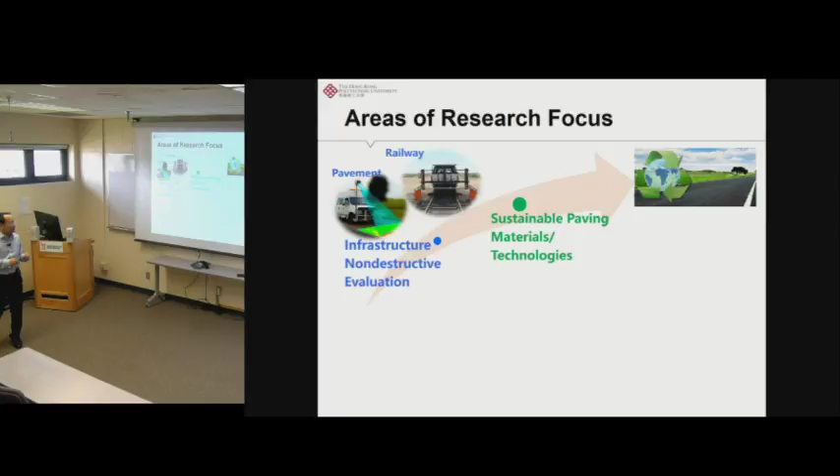The second area is about sustainable paving materials and technologies. Under this area, we worked on different recycled waste materials. For example, rubberized asphalt or warm rubberized asphalt, and also reclaimed asphalt pavement, and also waste plastic.

We also worked on different functional pavements. For example, we used porous asphalt as a way for stormwater management, and also for noise reduction. We also did some research on photocatalytic pavement, which is a functional pavement that can help degrade vehicle emissions.

One thing we have been working a lot on is low noise pavement. This is very important for high-density cities like Hong Kong, because of the high population density, many buildings are actually built right next to the roads. So how to reduce traffic noise caused by tire-road interaction is something we have spent a lot of effort on.

We worked on both low noise asphalt pavement, using technology like porous pavement or rubber material, and also worked on different surface textures for concrete pavement to optimize its traffic noise and skid resistance.

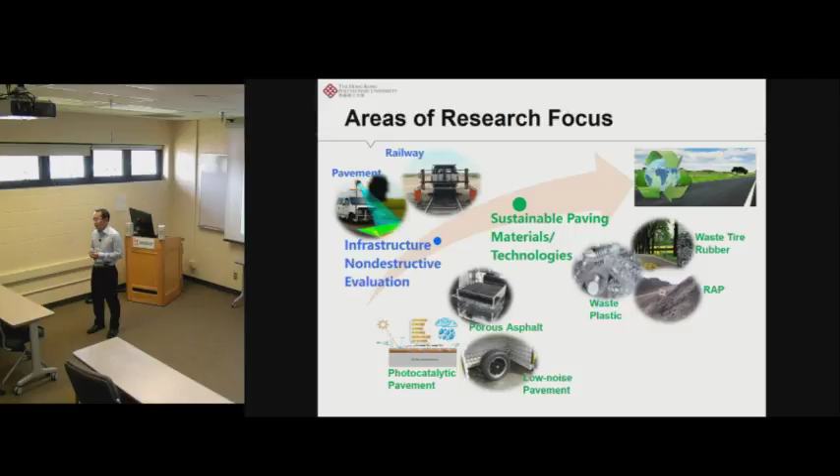Finally, we also work on different tools to quantify the sustainability of different pavement materials and technologies. I started working on this while doing my postdoc with Professor Al-Qadi here.

At that time, we worked on life cycle assessment, LCA, on warm mix asphalt. There's also other tools like eco-efficiency analysis, a similar tool, which allows us to provide quantitative information on sustainability that can be used by decision makers to make decisions.

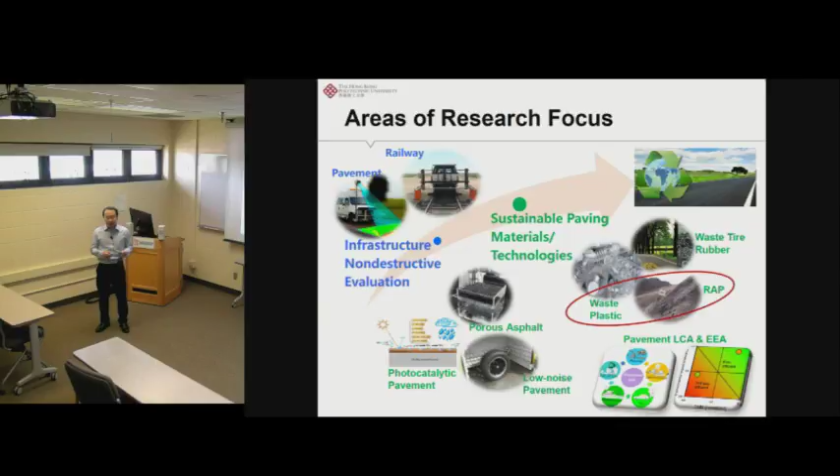So this is just a quick overview of the research we are conducting now at the Hong Kong Polytechnic University. In this presentation, I'd like to share with you our research on combining two waste materials: waste plastic and reclaimed asphalt pavement.

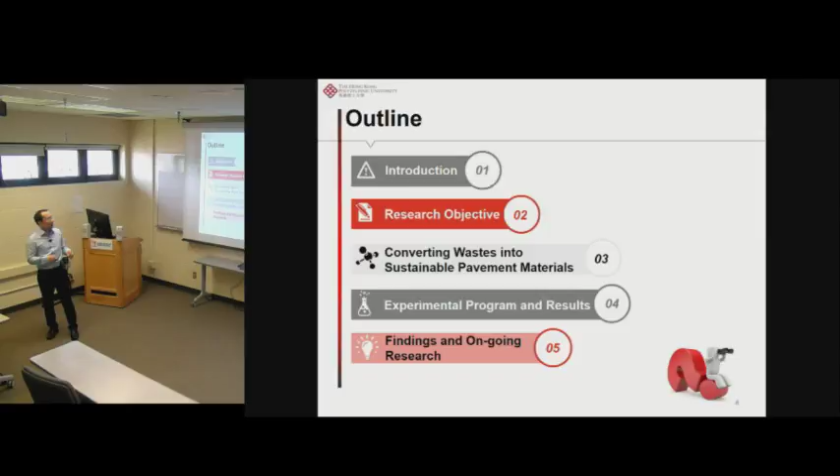Here is the outline for my presentation today. I'm going to start with a brief introduction to the two waste materials we are investigating in this study: waste plastic and reclaimed asphalt pavement. First, the waste plastic.

When we talk about waste plastic, first we should know what plastic is. Plastic is a material we are all very familiar with, it's almost everywhere in our daily life. But one thing we should be aware of is that plastic is not a single material, it's a family of thousands of different materials designed for different purposes.

We have both thermoplastic material and thermoset material. For thermoplastic, for example, PVC, PE, or PET are all thermoplastic materials. For thermoset material, we have things like polyurethane or epoxy. Right now there is some research ongoing on using polyurethane and epoxy as cold binders to produce cold mixtures, so we are also working a little on that.

I'd like to emphasize that when we talk about plastic, it's a big group of materials instead of one single material. In this study we cannot deal with all the different types of material, so we mainly work on one of the plastics, which is PET, a material used to make water bottles and drink bottles.

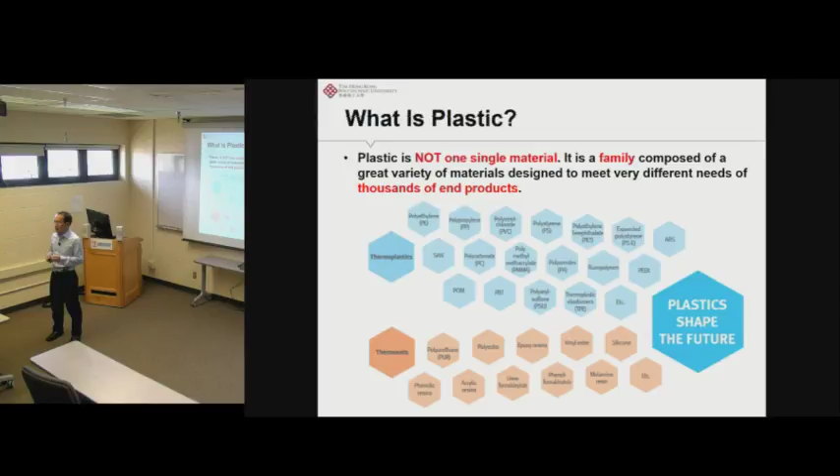For different plastic materials, we can use them to make different products serving different purposes. So we have plastic bottles, made of PET material, and also plastic bags, which we used to use a lot in supermarkets, made of PE.

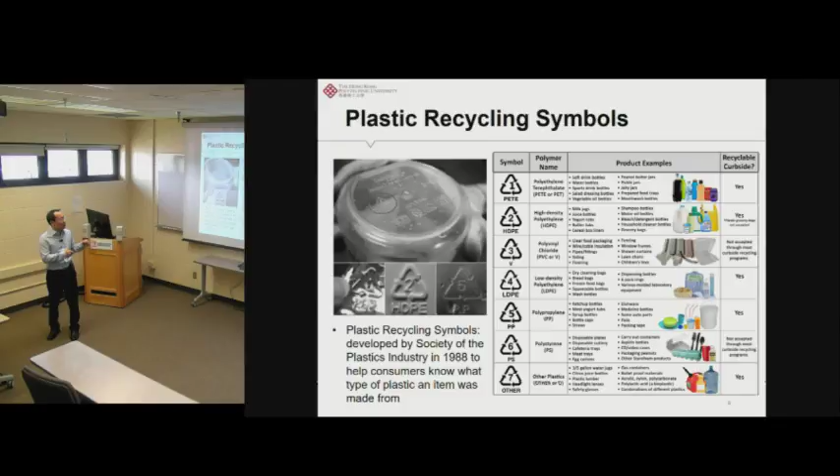To differentiate the different plastics, the Society of the Plastics Industry developed some symbols. If you have a water bottle and flip it to look at the bottom, you will see a triangle-shaped symbol. By reading these symbols you can identify which type of plastic was used to make that product. For example, if we see number 1 inside, it always refers to PET or PETE. So for all drinking bottles, you will see number 1 labeled at the bottom of the bottle.

Here are some statistics on global plastic production. In year 2015, the total plastic production in the world was about 269 million tons, which is obviously a huge number.

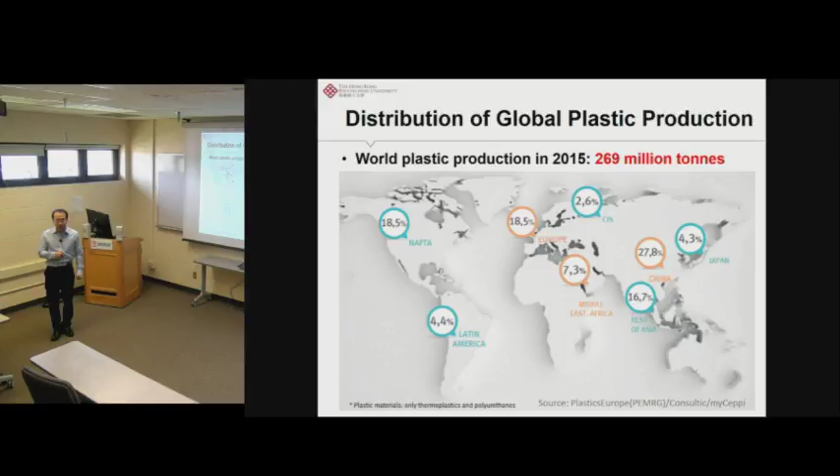As expected, China is the country which produced the most plastic, followed by Europe and North America. Currently in Hong Kong, waste plastic is the second largest waste category of municipal solid waste. Probably you can guess what is the first largest waste category.

Jaime, you know what it is? Paper? Paper?

That's not correct. Rubber? Flour? From tires? Rubber is not as much as actually the waste plastic. Who said food? Yes, food waste is the number one waste category of municipal solid waste in Hong Kong, and I think also probably in most cities in China. But waste plastic is the second largest, so a lot of waste plastic is produced.

According to statistics, you can see how the waste plastic production and disposal rate increased over the years. But at the same time, we noticed that the plastic waste recovery rate in Hong Kong keeps decreasing. This is due to some complex reasons, probably related to some political issues. Anyhow, there's severe imbalance between waste plastic disposal and recovery. In 2015, the total amount of plastic waste was approximately 800,000 tons, but only about 10% of the waste plastic was recovered through recycling. So we are facing a big challenge of recycling waste plastic material.

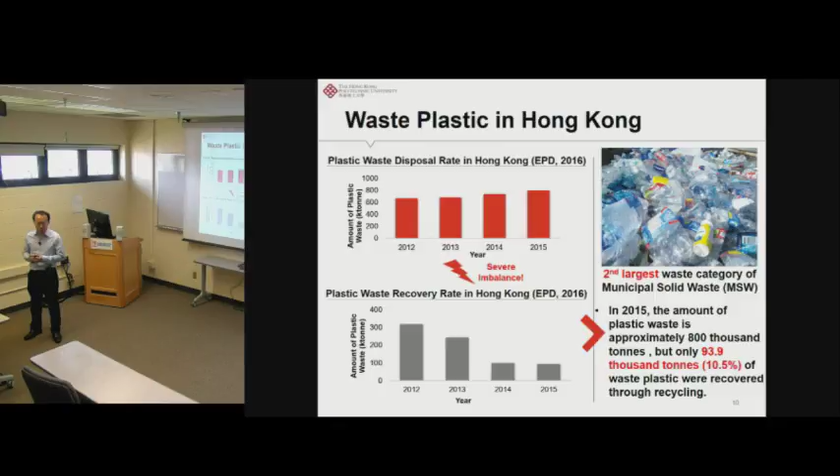To manage waste plastic, there are two ways. The first is landfilling, but obviously this is not an ideal method. First, it decreases our land space, especially in cities like Hong Kong, where we are very short of land space. We don't want a lot of waste occupying our limited land space. Also, if not done correctly, it may cause land and water pollution. Because of this, increasing recycling and reuse is not only desirable, but rather essential.

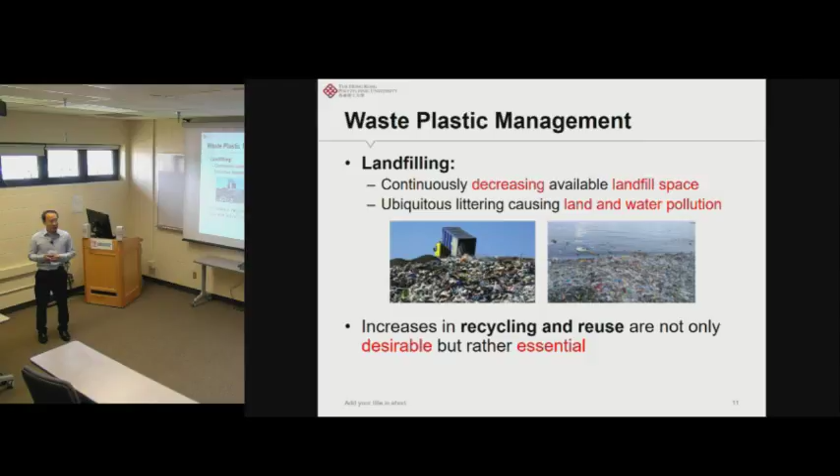To recycle waste plastic, we have different options. We might use the mechanical or physical way, cutting the waste plastic into small pieces without any change to its chemical composition, then reuse it. We can also do it in a chemical way, which means first chemically changing the material and then using it. Or we can do it in a thermal way, incinerating the material to produce energy.

In pavement engineering, we also want to contribute. Quite a few people have tried using the mechanical way to recycle waste plastic into asphalt mixture, basically treating waste plastic like waste tire rubber, cutting it into small pieces and adding it to the asphalt mixture. But this was not very successful. Many researchers tested the mechanical performance of the mixture after adding waste plastic, and found the mechanical performance is good.

But during production and storage, there are two major concerns. One is emission during construction, because for hot mix asphalt, we have to heat the material to high temperature, and at that high temperature, adding waste plastic may generate emissions. Also, storage stability is a problem because the plastic material has a very smooth surface, which does not allow good compatibility between the plastic material and the asphalt binder. Because of these two major concerns, there has not been much real field application of physically or mechanically treated waste plastic in asphalt pavement.

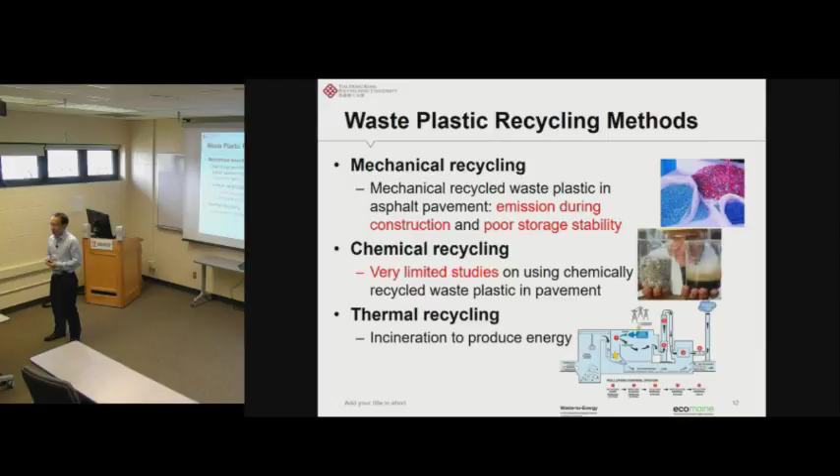In addition to physical treatment, we can consider chemical treatment, but in this area not much has been done yet. This is actually one of our motivations for conducting this study. We want to see whether we can first convert waste plastic into a different material, then add it into asphalt mixture. In this way, we want to overcome the two limitations of mechanical recycling, and we also want to know whether, after such chemical treatment, our plastic-derived material or additive can help improve the performance of asphalt mixture as a modifier or additive. So that's just some brief background on waste plastic.

Now we are switching to RAP. We know that waste plastic is one of the major types of municipal solid waste, and in addition to municipal solid waste, we also have construction waste as another major type of waste material.

In our pavement engineering, we all know that reclaimed asphalt pavement, or RAP, is one of the major components of waste produced from road construction. The reuse of RAP has been very widely promoted by transportation agencies all around the world.

But the RAP application percentage usually stays low, typically 10 to 30%, mainly due to performance concerns, especially fatigue performance, low temperature cracking performance, and moisture damage resistance, because the aged binder becomes much more brittle. So we have big concerns about cracking resistance and moisture damage resistance. Unless we use certain rejuvenators or softer binders, we usually control our RAP percentage at a relatively low level.

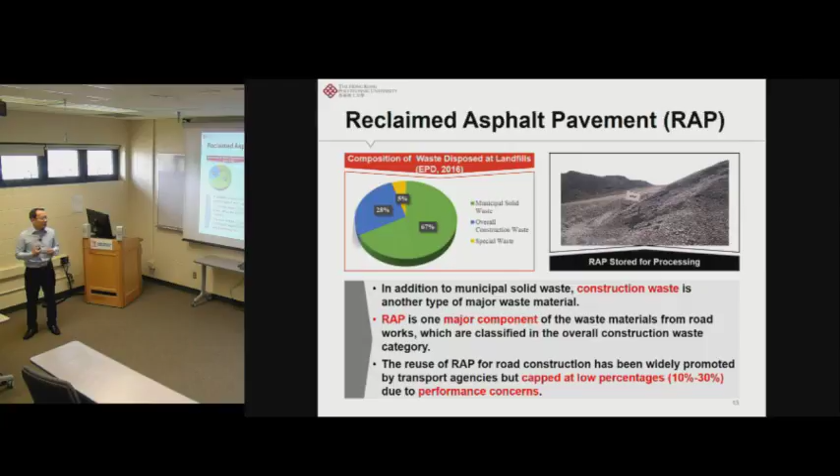So in this study, we were thinking whether we can first chemically treat waste plastic and convert it into some modifier or additive, and then use this modifier to improve the performance of RAP mixtures, especially those containing a high percentage of RAP. Our specific objective is to explore the feasibility of using functionalized additives, produced through chemically recycling waste PET plastics, in high-RAP bituminous mixtures, to make them more durable compared with those without the additive.

Our motivations mainly include, first, recycling two waste materials, plastic and RAP, simultaneously, and second, which is more important, improving the performance of high-RAP bituminous mixtures, especially their moisture damage resistance and cracking resistance. This is what we plan to achieve through this study.

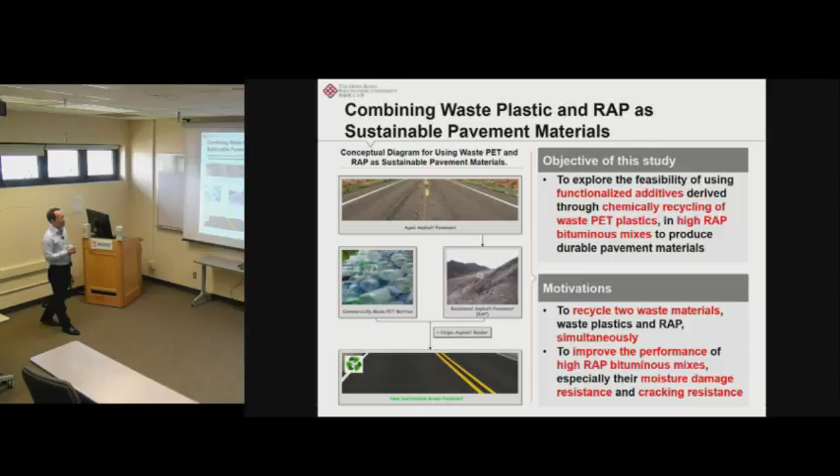So here is what we propose to do. First, we are going to collect waste plastic. As I mentioned, right now we are mainly working on waste PET, the plastic used to make water bottles. Then we are going to chemically treat the waste plastic and convert it into some additives, which we call waste plastic additives.

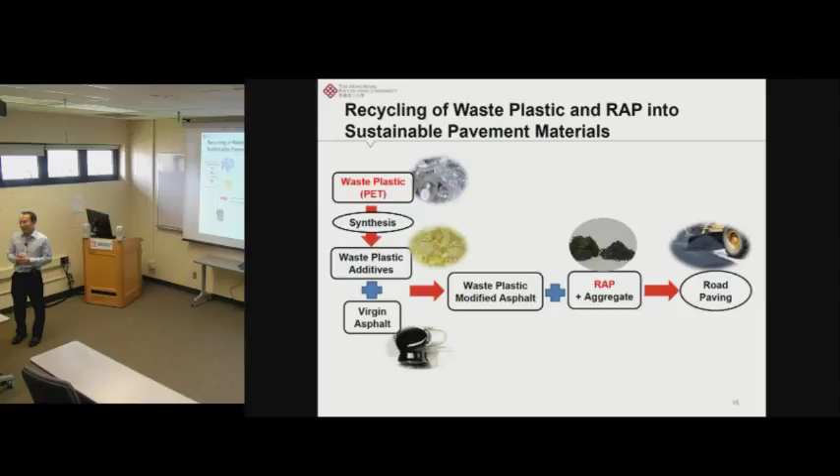Then we are going to add this additive into the virgin binder to produce the waste plastic modified asphalt or binder. Then we mix it with RAP and virgin aggregate to make the bituminous mixture, which can be used for road paving. In this flow chart, obviously the most important step is the synthesis step. This is going to determine whether this idea can finally be achieved.

In order to chemically treat the waste plastic material, we actually have many different options. Basically, if we use any chemicals to react with plastic and convert it into something new, we can consider it a chemical treatment. So we do have many different options, and in this study we actually selected a chemical treatment method called aminolysis.

So what is aminolysis? Aminolysis refers to a reaction in which an amine is a reactant and becomes part of the reaction product. Basically, we just use some amine material and make it react with waste plastic, and then we can chemically treat the composition of the waste plastic and convert it into something different.

The reason why we selected this process is, first, this process is considered atomic economy. Why is it called atomic economy? This is because after the chemical reaction, we will not lose any material, we will not lose any reactant. Everything we used for the reaction becomes the final product, so the leftover can continue to be used for further chemical treatment.

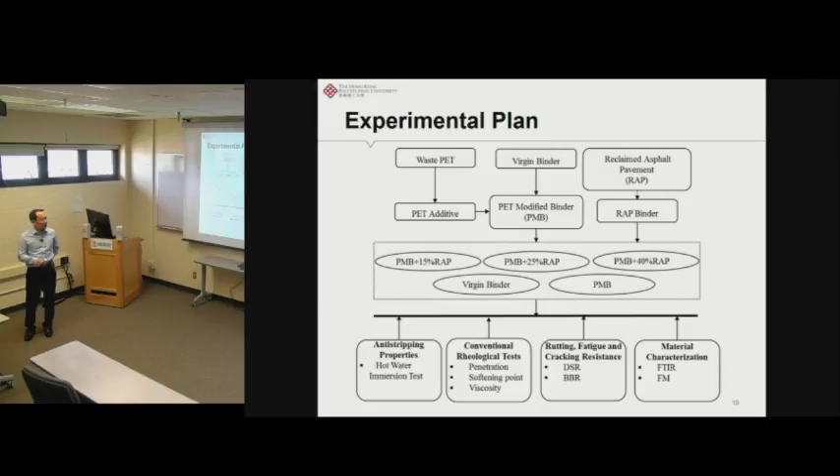We also have the virgin binder and the PET modified binder without any RAP binder as control materials, so in total 5 binders. For each binder, we conducted the anti-stripping property test, the conventional penetration, softening point, and viscosity test, and also the DSR and BBR test, and finally some material characterization analysis. Now I'm just going to quickly go through the results we have obtained for each of the tests.

First is the anti-stripping test. The anti-stripping test we conducted is the hot water immersion test according to the ASTM standard. I assume many of you are familiar with this test - basically we first coat the aggregate with the binder, then put it into hot water and boil the aggregate with the binder for a certain amount of time, then take it out to check the surface coating of the aggregate.

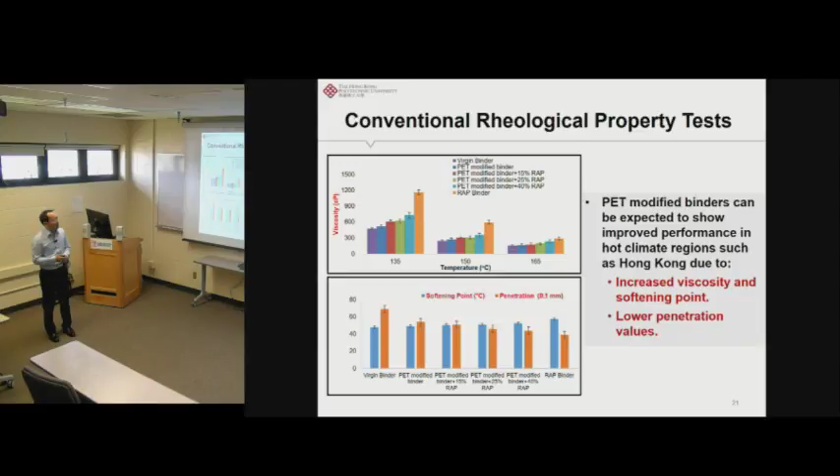indicate that the PET modified binders can be expected to show better performance in hot climate regions, such as where I'm now working, in Hong Kong. This is because it increases the viscosity of the binder and also decreases the penetration of the binder material.

But notice these tests are conducted at different temperatures. The viscosity increase is actually not that much, not that much. So this is important regarding the workability of the binder and the mixture.

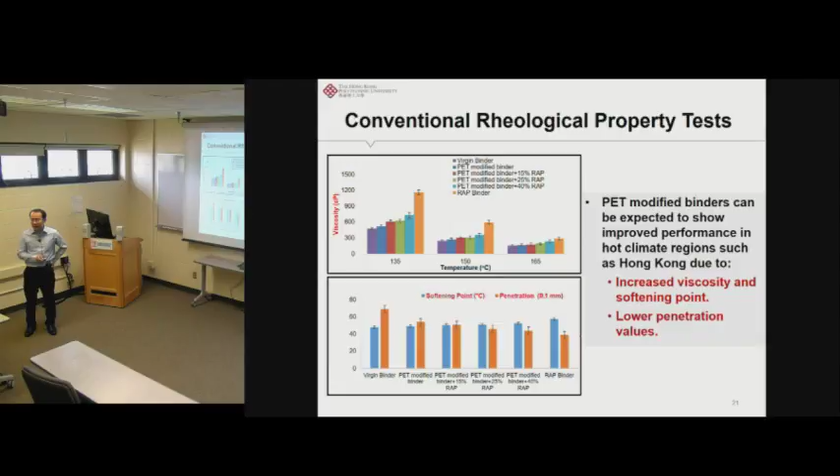In addition to the lab test, as researchers, we also did a bit of simulation, the molecular dynamic simulation. In the molecular dynamic simulation, we selected the conventional 12-component asphalt binder model, and for the PET additive, we just used its chemical formula to build its model.

Through the molecular dynamic simulation, we got a parameter called the cohesive energy density, and we compared the cohesive energy density of the virgin binder without any PET additive, and with 2% and 4% of PET additive. We found that the cohesive energy density actually increased about 25% after we added the PET additive.

This simulation result is consistent with our softening point, viscosity, and penetration test results, because a larger cohesive energy density indicates the material is probably a little stiffer.

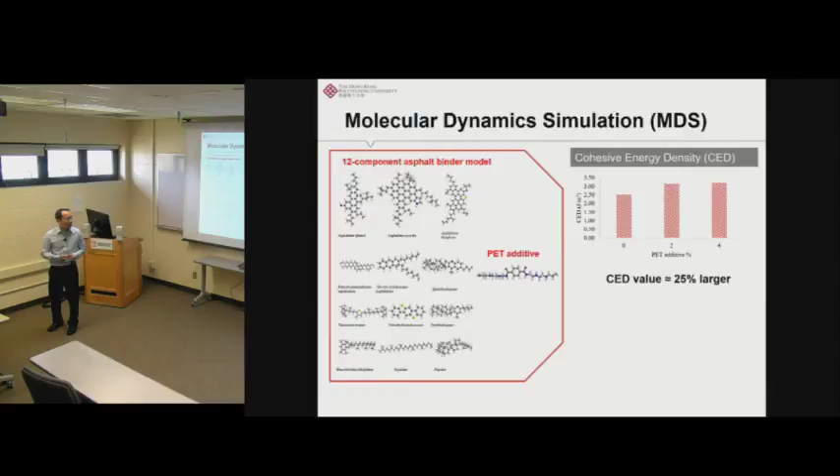Then we also conducted the DSR test to check its rutting performance and fatigue performance. We all know that by doing the DSR test, we can get two important factors: one is the rutting factor, one is the fatigue factor.

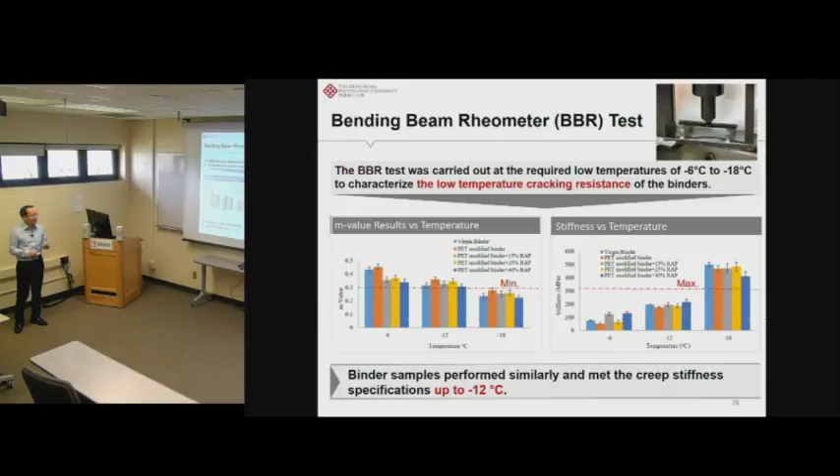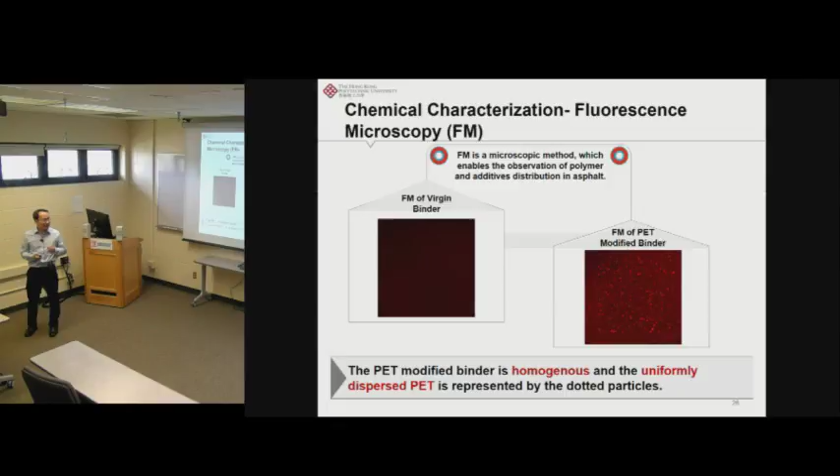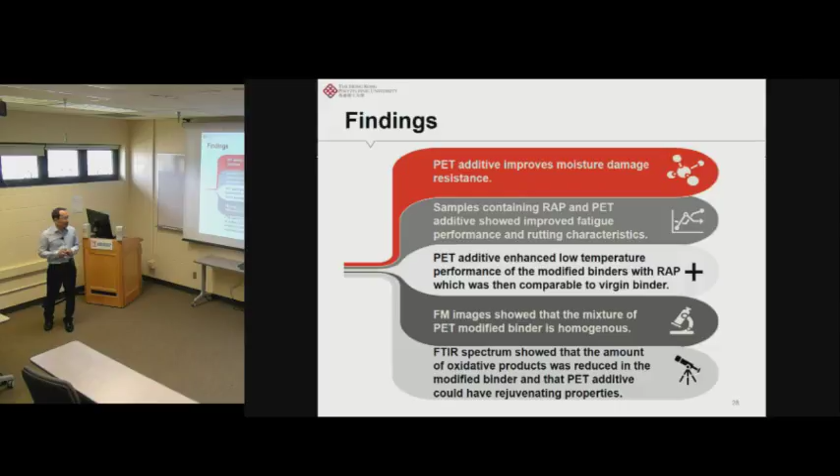So that's actually what I have presented - just what we have done so far. This project is actually still ongoing.

You can see I only presented some tests for the binders. We are now still working on this project. What we are now working on is to further verify the effect of the PET additive as an anti-stripping agent and rejuvenator through different tests. For example, definitely we need a mixture test to verify, and also probably some mortar test will also help. We want to verify such effects really exist.

And also, as I mentioned at the very beginning, plastic is a big family of different materials. Right now we only focus on PET, and next we are going to extend the types of waste plastic to different plastics.

Okay, such as the PVC and the PE. Right now we are working on this actually, and also for the aminolysis treatment process, we can actually select different types of amines.

In this study we picked one which is called TETA, and we can also consider other amine materials. If we select different amines, our final product will also be a little different, and their modification effects to our binder will also be slightly different.

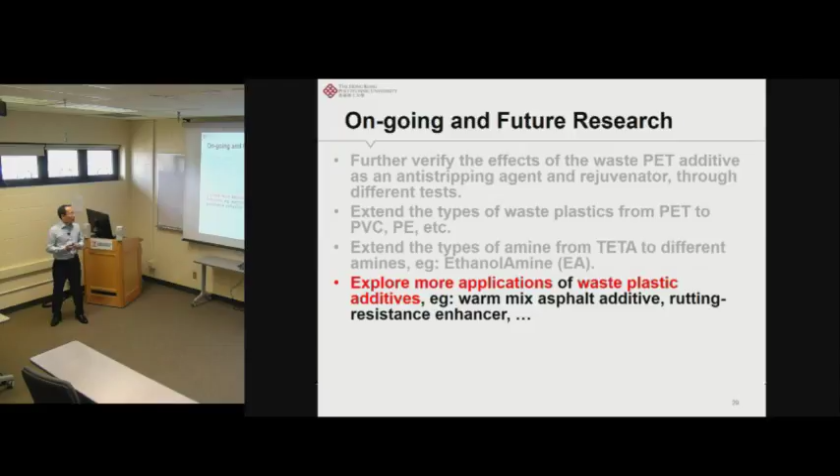So we are going to investigate different types of amine materials. And for different amine materials and waste plastic, we are going to further explore more potential applications.

In this study, we found that it seems the PET-based additive has good anti-stripping and rejuvenating effect. So we also want to investigate whether we can produce some additives from waste plastic for different purposes, for example, as a warm mix additive, or as a rutting resistance enhancer.

Depending on different amines and plastics we use, we want to explore different potential applications. And for each application, we need to optimize the synthesis condition. We want to find out what's the best synthesis option, like the temperature and the synthesis time.

We need to complete the chemical treatment, and of course we also need to figure out the cost, and how much cost we are going to increase if we use the additive, and also how much performance enhancement we can achieve.

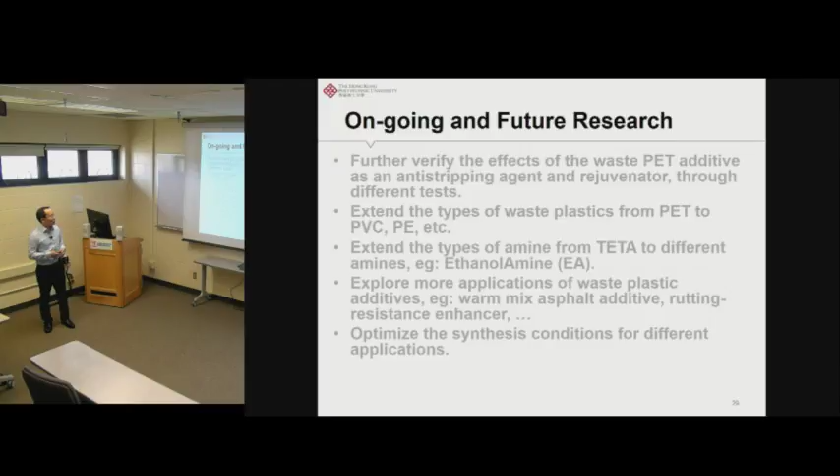Of course, from a life cycle point of view, we need to conduct the LCCA and LCA analysis, to provide more quantitative information to the decision makers for them to decide whether there is some material we can potentially use. So I think with that I'm done with my presentation.

What was that? I didn't hear that. Yeah, that's all for my part. Thank you all, and I'll be glad to take any questions.

We'll take questions. Yes, I have a question. So for the PET modified binder, what's the ratio of the PET additive? Yeah, I should have mentioned it's 2% right now.

So did you study the effect of the ratio? Yes, we did some preliminary tests before we used this percentage.

Because as you can see in my presentation, if we add the PET additive, it's going to increase the viscosity slightly. If we add too much, that probably will make the workability a problem. And also we found beyond 2%, the modification effect will not be further increased much. So for the preliminary test, we decided to pick 2%.

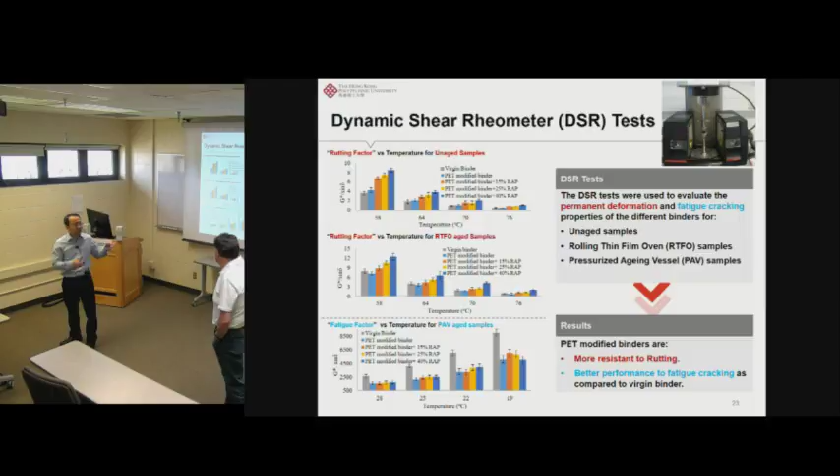I think the threshold value is made by someone, so it's something subjective rather than objective. The thresholds will be - let's say, for example, I'm not sure if you're using superpave grading - adding PET, first of all, whether it changes the grade or not, we're not talking about that.

These thresholds will change, because let's say if it's initially, let's say it's a 64-22, but when you add PET it stiffens the binder and it becomes 70 minus 22. So in that case, at 70 degrees Celsius this rutting value will be tested, and the threshold will be at a different temperature to be matched compared to 64. Yeah, that's what I said.

It's temperature and load. So, for example, in that case you will switch it to a different temperature since they are tested differently. Yeah, here we did test different temperatures. The original binder, virgin binder grade is 64, and it's non-modified. So we did test different temperatures, but we didn't touch the threshold value for which temperature grade it is.

Actually, in Hong Kong, we are not adopting - we haven't adopted the full superpave system. We partially adopted it - like for PG76, we don't have a dash, we don't have negative 22 or something. We just have PG76 because we are not worried about its low temperature grade. So it's kind of partially adopted in Hong Kong.

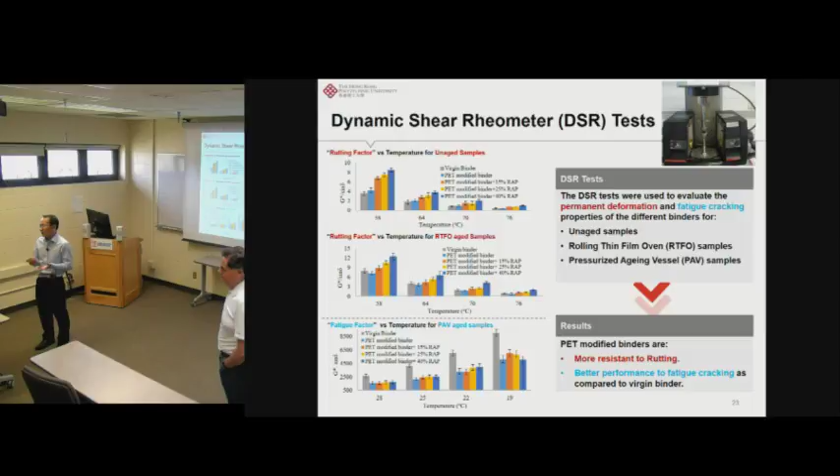So here we just want to use the superpave binder test to show how it can change with different performance properties. Other questions?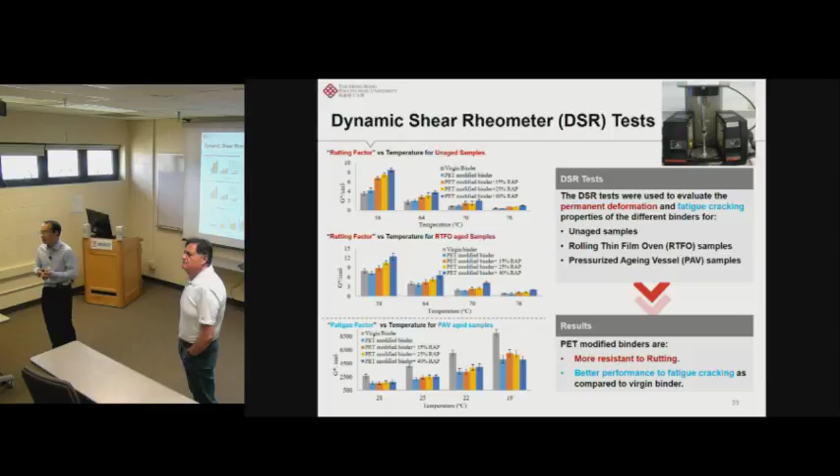I was wondering if you've combined the PET with the RAP binder, because when you mentioned rejuvenation and compared these binder combinations, that decline in the FTIR is because you have a virgin binder relative to the RAP binder, right? Actually, I think - like the absolute rejuvenation, if it's just PET and the RAP binder itself - have you guys done that?

So we can still compare them, but I think you're right - we could just directly add the PET additive into the RAP binder without any virgin ones. I think here we can already see the effect, but if we directly add the additive into the RAP binder, I think it would be more obvious.

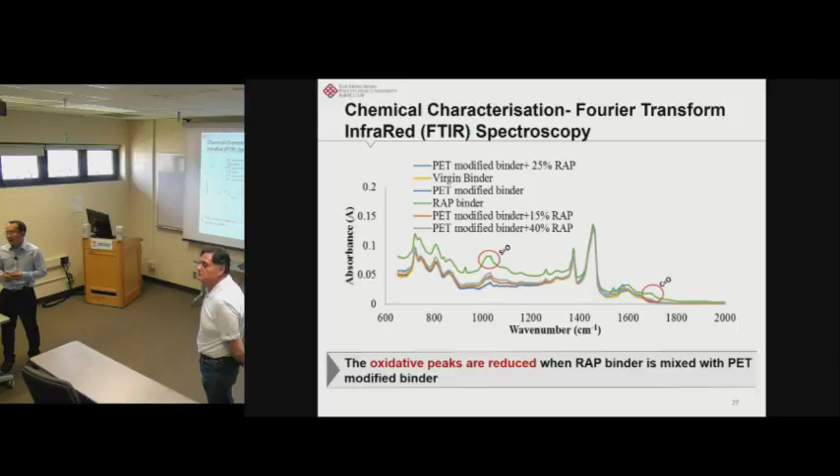As I mentioned, this is kind of an ongoing study. What I presented is the results we have, the tests we've completed and already summarized. We do have a lot to do actually, including the mortar test and the mixture test. Right now we are still staying at the binder level, and even for the binder, we are still running more tests.

My question was on the manufacturing process for the additive. Is that a hazardous process? Is there hazardous fumes or anything that comes out?

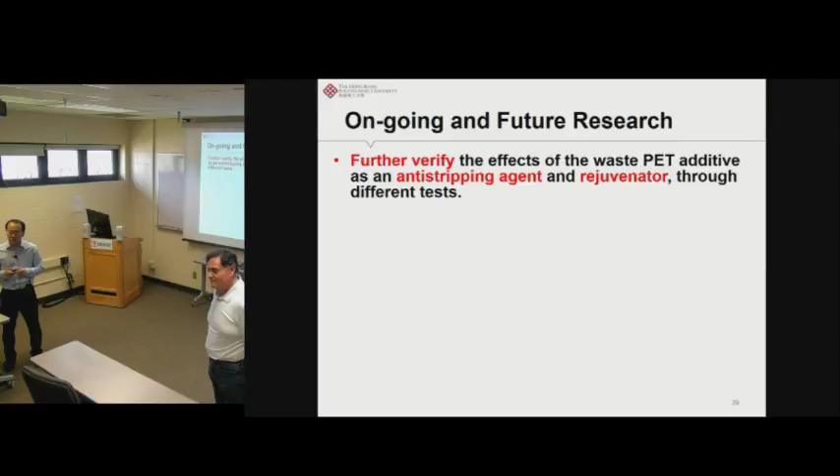No. This is actually basically, everything is done in something kind of sealed, it's not open to the air. So even if there's something, it will not be released to the outside. This process, what happens is just there's no additional material generated. What we have is the PET, the amine, and the product.

We will add extra amine material. That amine material, which is not reactive, we save it for the next round of reaction. So we don't expect any additional products generated, and if there's no additional product, we don't expect there will be any hazardous material produced during this process.

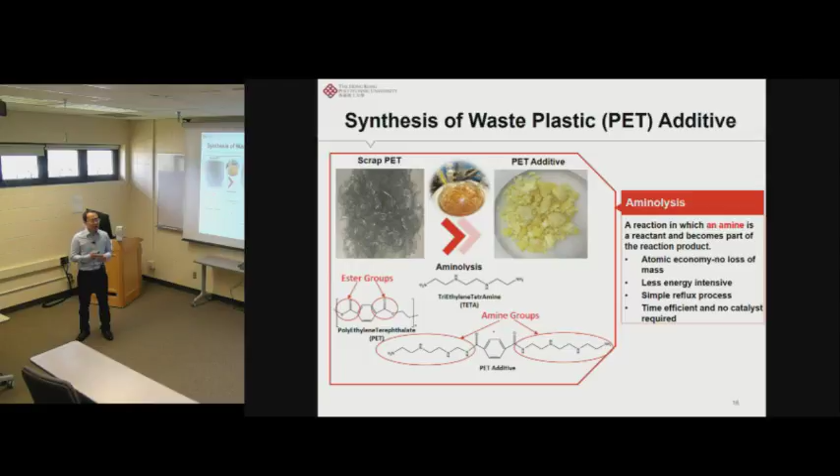Other questions? I have a quick question now. When we are getting all these waste materials, do we separate them? Because with polyester or polyurethane, the temperatures can be 350 and this material is still solid, not melting, so in that case they will be more like fillers in the asphalt concrete rather than an additive. I wanted to see how they do the process of separating these materials.

Yeah, I think I know where your question is from. This is actually why we want to work on different waste plastics. For those people who are treating the waste material, they don't want to do the sorting. In most cases, they just put all different types of waste plastic together - you get the bottles, you get the plastic bags, so everything is mixed together.

Like PVC, I know it has a very high temperature. I work on welding PVC, so we use very high temperature, and use it as a mold in the lab for the warm mix project. You put the mix in it and it will be still. But if we use some amines with PVC and heat it, it will also degrade with time. It's better to first cut it into small pieces before we conduct the chemical reaction, because if you just dump the whole PVC pipe it will take too long.

So this is yet to come. We have already completed some tests. We have a postdoc working on this - he did his PhD on this with a chemistry background. Also for PVC, it's actually a poisonous material, so we need to be more careful treating the poisonous parts, and also the mixing and sorting.